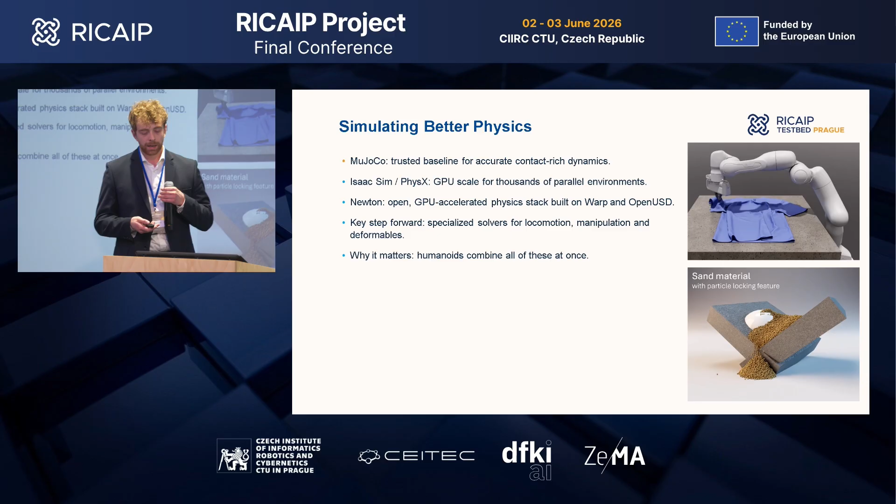Now let me introduce Newton physics, which brings the idea of a multi-solver physical stack. The important idea is to use a specified solver for the right phenomenon. From solvers for contact-rich learning, through complex parallel joints without numerical instabilities, to specialized deformable solvers for soft structures, non-rigid bodies, clothing, or hanging cables. And in humanoids, all of them combine.

But to actually simulate the reality into every atom is impossible. Rather, we can use the simulator and its great advantage, and that's the scalability, and actually deliberately interrupt or disturb the scenes and also the robotic models. We can introduce randomization: randomized friction, textures of the surfaces, motor performances,

To fix this, we can introduce active domain randomization. It sets up a two-player game with the policy that's learning how to move the robot in the controlled environment, and the second, the adversary that actively pushes the limits of the learning environment. It ensures to achieve optimal learning rate.

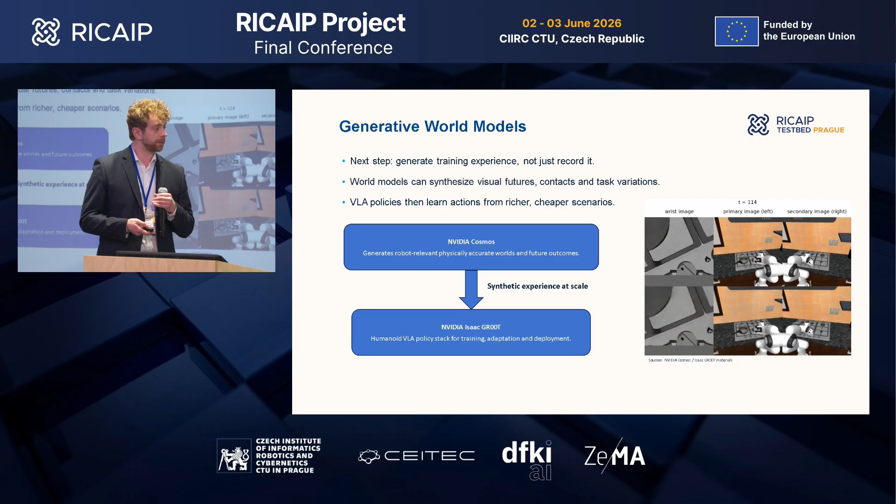And to conclude, there are still many challenges to solve, but the rapid evolution of physical AI makes them totally achievable. Thank you very much.

Thank you so much. And also congratulations on your new center. That's awesome. Yeah, celebrating young talent. Thank you very much. And also goodbye to Antonio. You will be missed. Thank you for all your contributions today. Thank you. Thank you so much.

Right, the next person to speak to us will be on the theme of modeling the world and objects in 3D, and is Torsten Sattler, the senior researcher here at CIIRC CTU. Again, the floor is yours. Welcome. Thank you. Yes, please. Well, let's see whether you're still applauding in 10 minutes.

I'm Torsten Sattler. I'm one of the 4 tenure trackers hired as part of the RICAIP project. I think I'm the only one talking today. As part of RICAIP, I came to Prague to build my own research lab. And one of the things that we're doing is trying to build 3D models of scenes and objects, and that's what I want to talk about now. We're interested in building this from images. So our input is a set of images, and then we typically do 2 stages.

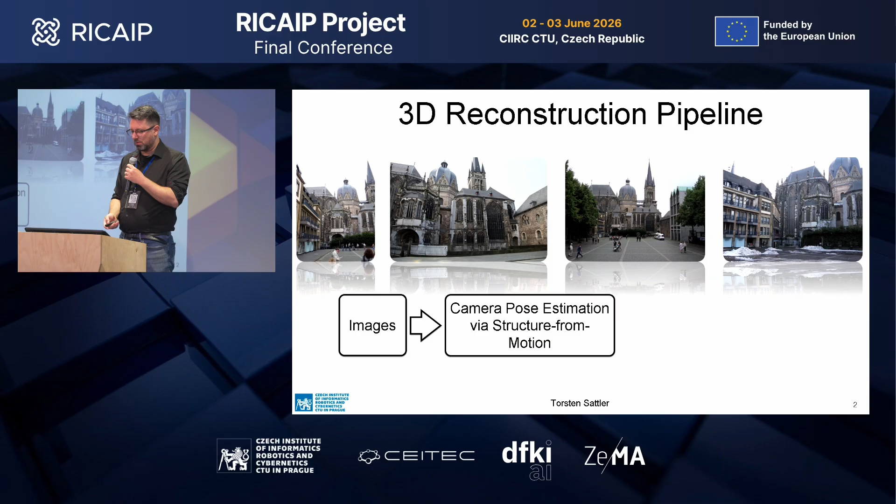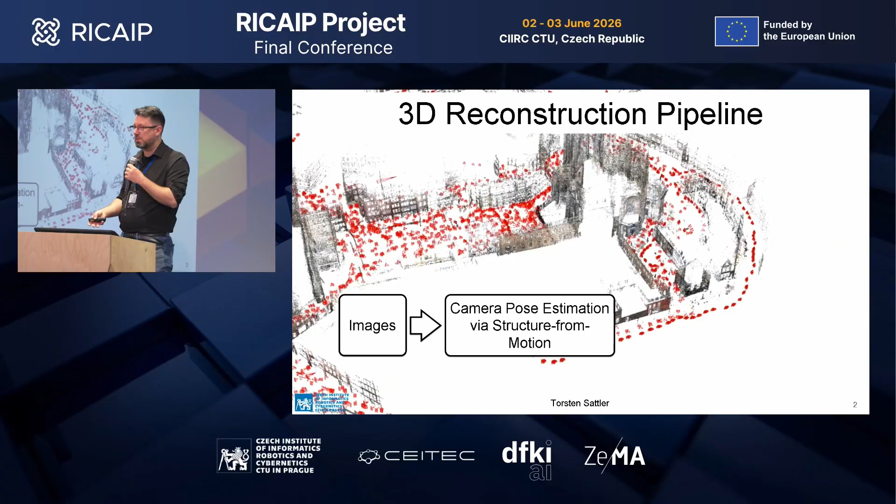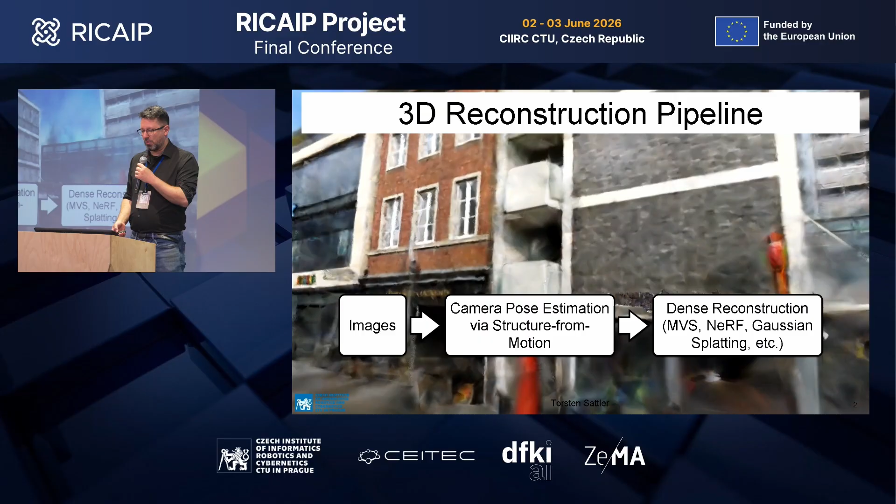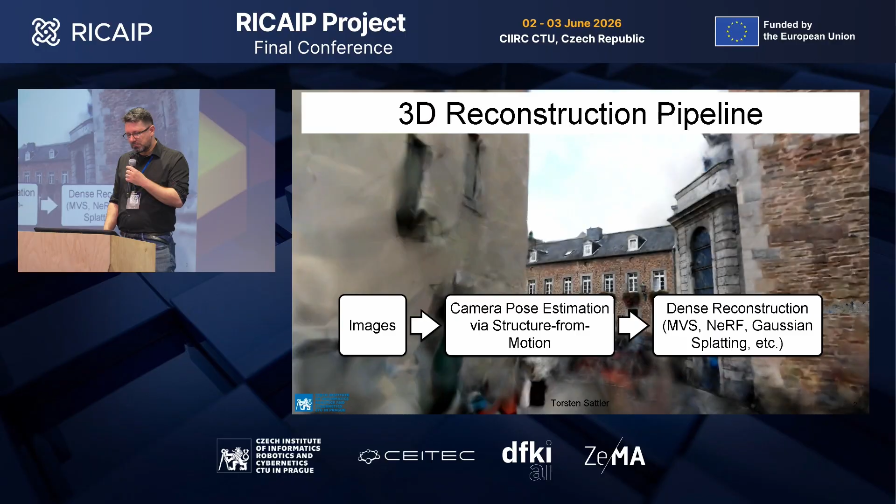The first tries to estimate where all of these images were taken using something called structure from motion. The output is what you see here: each red pyramid corresponds to the position and orientation from which an image was taken, and we get a sparse reconstruction of the scene geometry. And in the second stage, we try to build a dense, detailed 3D model. For example, what you see here is about 4,000 images captured in the city center of Aachen, where I did my PhD. And this dense reconstruction approach is done using machine learning.

More precisely, we follow an approach that's called Gaussian splatting, where the idea is I represent my scene through thousands or millions of small objects called 3D Gaussians, which are defined by a position, a spatial extent, essentially ellipsoids, and a view-dependent color function. View-dependent means that if you look at a surface from different angles, you get potentially different colors, allowing you to model reflections and refractions. And the nice thing is that you can render these things very efficiently, especially compared to prior methods, by essentially doing what GPUs were designed for 20 years ago, which is rasterization of objects.

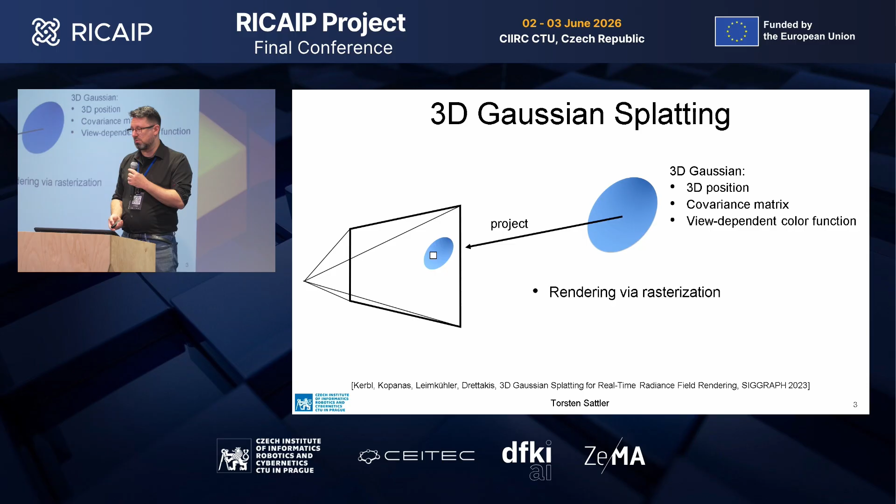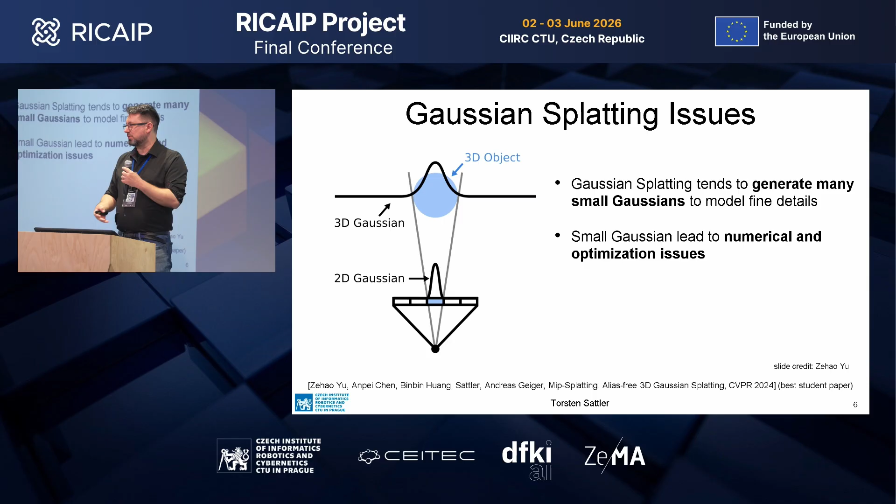What is happening there is that we are modeling objects by these 3D Gaussians. When we render them, we end up with a 2D Gaussian, and the whole learning algorithm tends to generate lots of small Gaussians because you want to model fine details. As with everything, small objects typically make the learning process hard. You run into numerical optimization issues.

And what the original paper published in 2023 did is they made sure that each Gaussian would render to at least a pixel by dilating the 2D Gaussian, which makes the training process robust, but introduces all these artifacts that you saw before: if you zoom out, everything looks larger than it should be because you dilate it to a pixel size when it should be smaller. And if you zoom in, you see these very tiny objects, which come from the fact that this dilation operation allows you to generate very thin Gaussians, but you still reconstruct the training images perfectly because you dilate them to the right size.

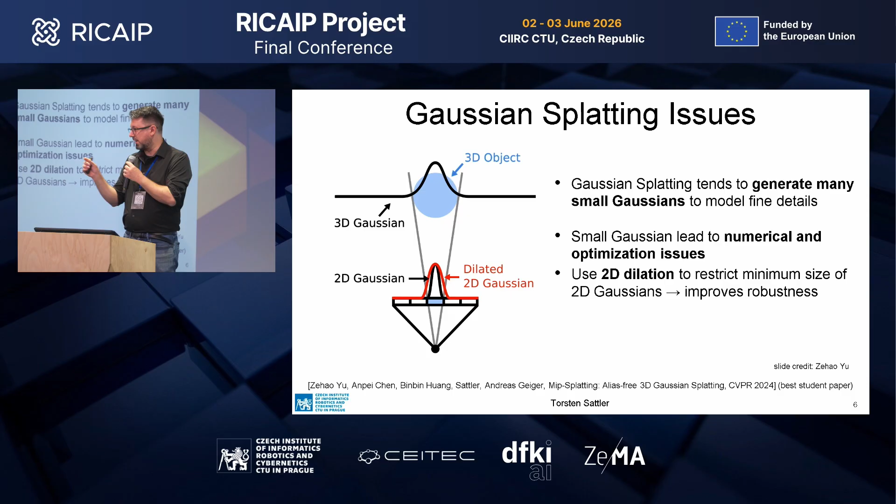In 2024, we showed that there's luckily a very, very simple solution to this: we have small Gaussians, which means lots of high-frequency details, and there's a very principled solution to handling problems caused by high-frequency details, which is low-pass filtering. So we enforce that 3D Gaussians have a certain minimal size, and then do smoothing in 2D to handle artifacts.

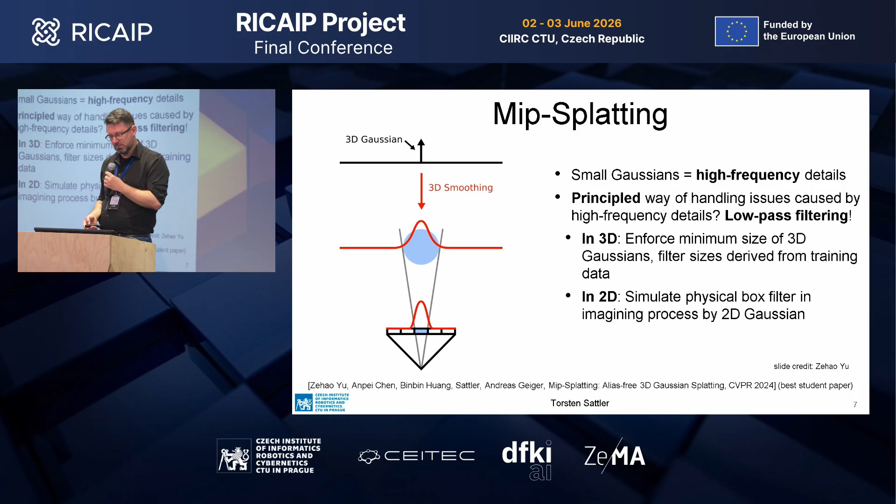As the previous speaker mentioned, one of the things that you could use this technique for is creating virtual worlds where you then can train robots. And for these virtual worlds, you would like to have control not only over the viewpoint, but also over the conditions under which you observe this. So this is Trevi Fountain in Rome, trained from images taken under different conditions, day and night. So we developed an approach that would allow us to handle this type of change.

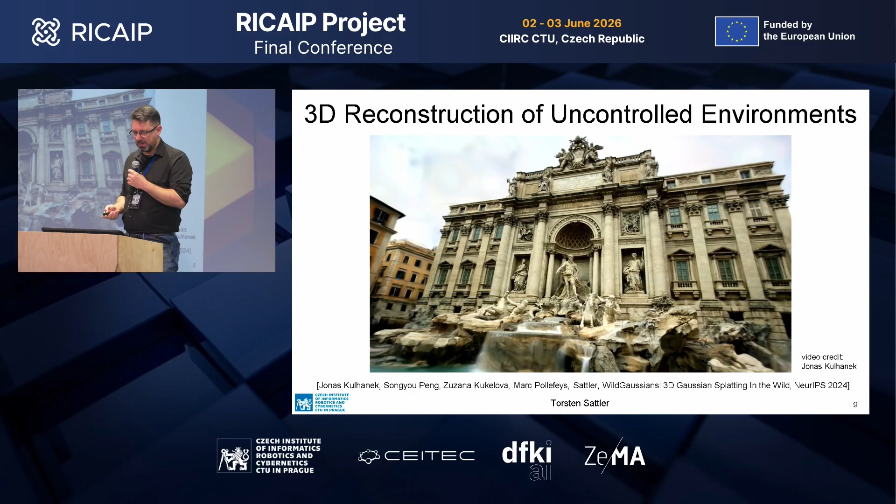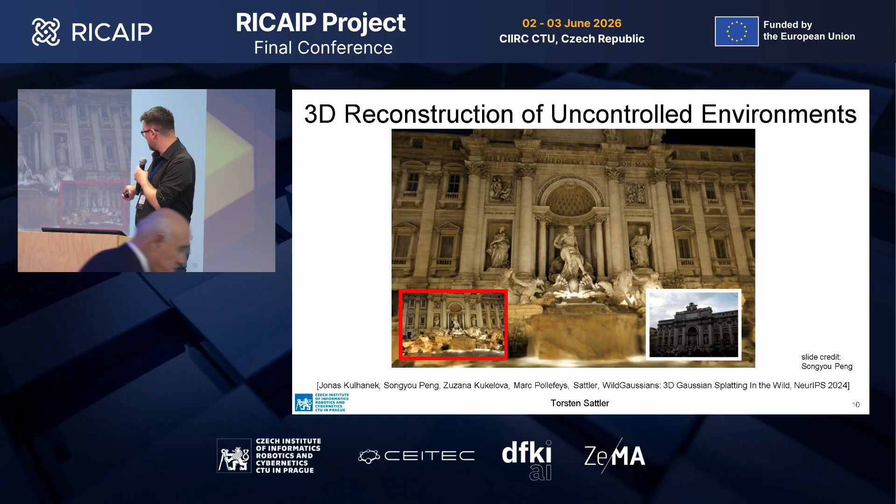It allows us to not only change viewpoint in the scene, but also change illumination conditions, and we get a very smooth interpolation. So here you see two conditions, and we smoothly interpolate them and apply the resulting lighting on the model, and you see that it smoothly varies from day to night, different illumination conditions. But this required that we would actually have data of the scene taken during the day, at night, and so on.

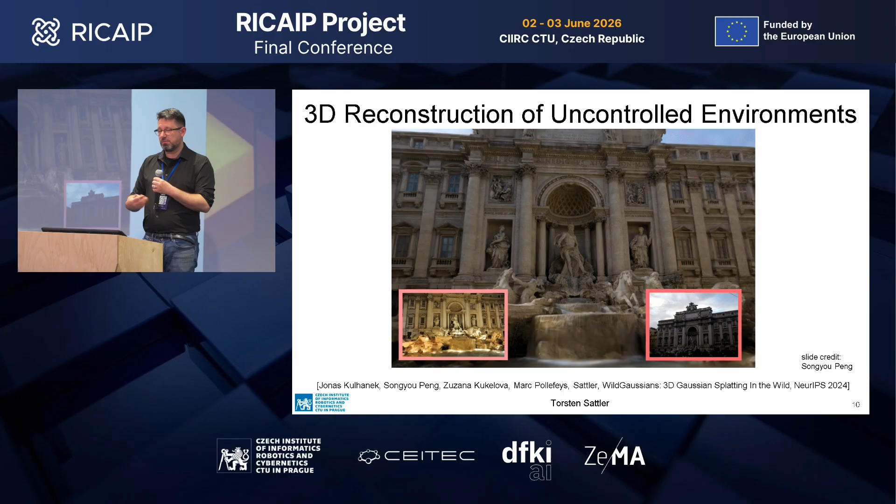And one question we're currently looking at is how can you simulate different conditions if you don't have the data? For example, if you had only taken images on Halloween night, could you simulate how the scene would look in summer during the day or in winter at night? One of the things we're looking at is using generative AI to simulate these different conditions. And here's a very sneak peek of the results.

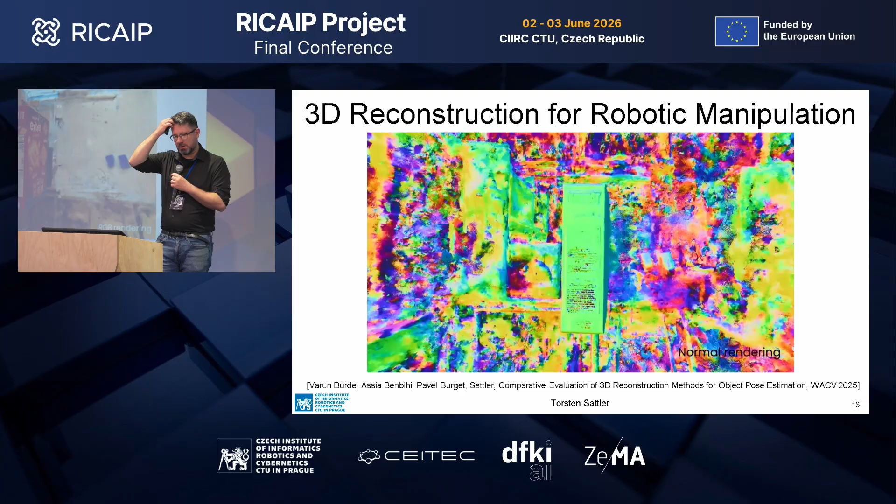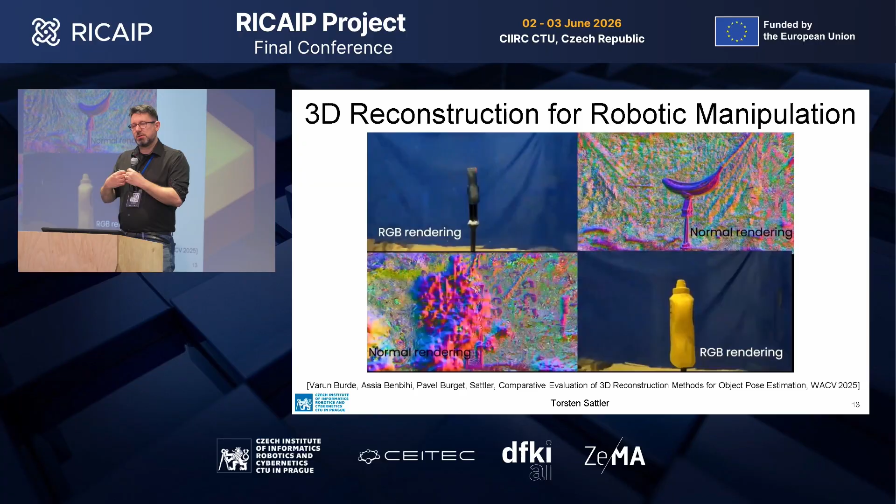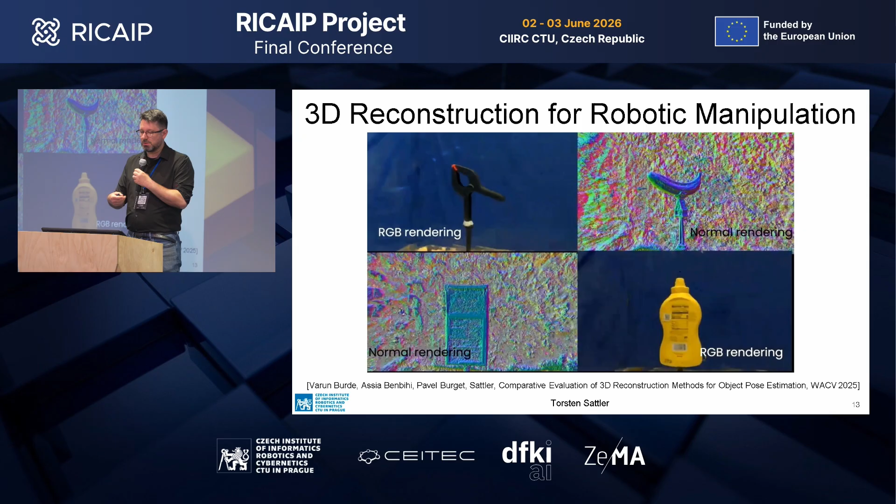The other question is, can we build 3D models that are actually useful beyond display or simulation? In a different line of work, we looked into using these 3D reconstruction techniques for object manipulation for robots. So in this case, we would scan different objects and reconstruct them, and then use these reconstructed objects rather than ground truth CAD models for object pose estimation. So the question was, can we go beyond needing very precise scans of objects that the robot could identify, estimate their pose, and ultimately manipulate, and do this only from images? And this is the result.

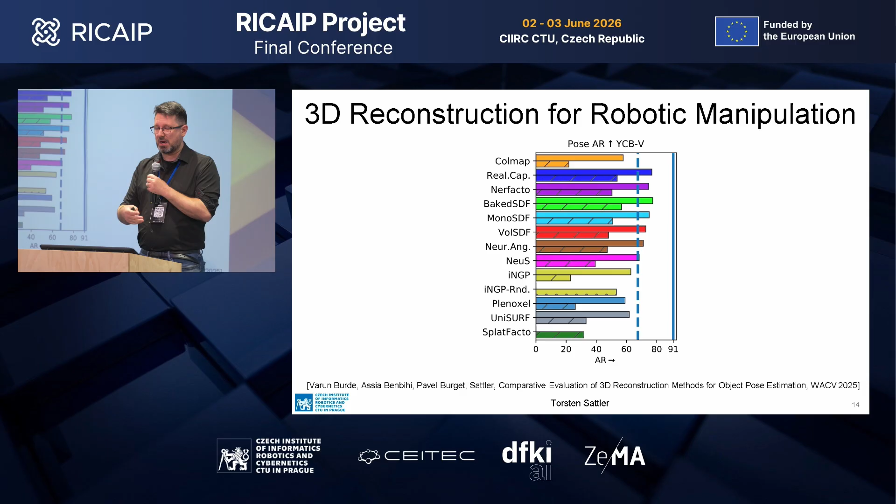And in recent work that Varun Burde, who is Pavel's and my PhD student, is going to present at ICRA, I think today, we looked into whether we can also use these 3D models for object manipulation. So given a reconstruction, which is the red model, can we determine where to grasp the object and then grasp it in simulation? And that's an overview of what we are doing.

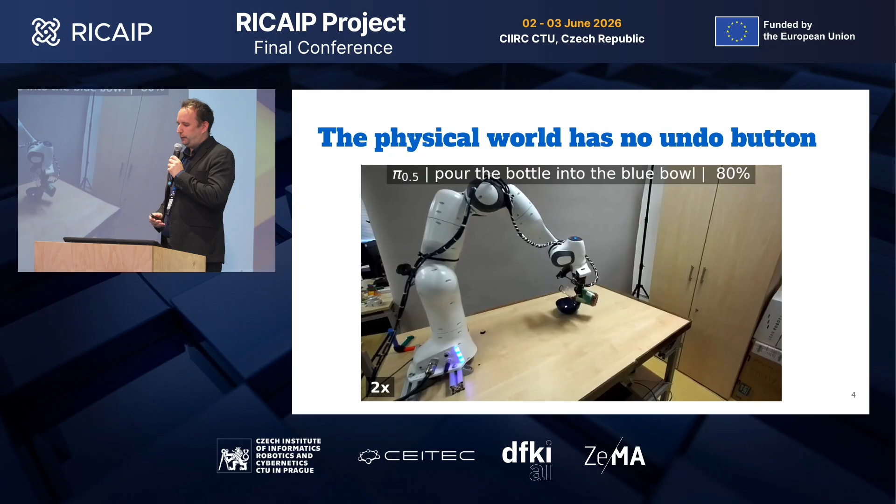But AI isn't perfect. There are always mistakes and misunderstandings we can't fully get rid of. In the digital world, a mistake is a click of undo. In the physical world, it's different. A mistake is either hard to recover, like this pouring example here, or it's dangerous to humans surrounding the robot. And the physical world has no undo button.

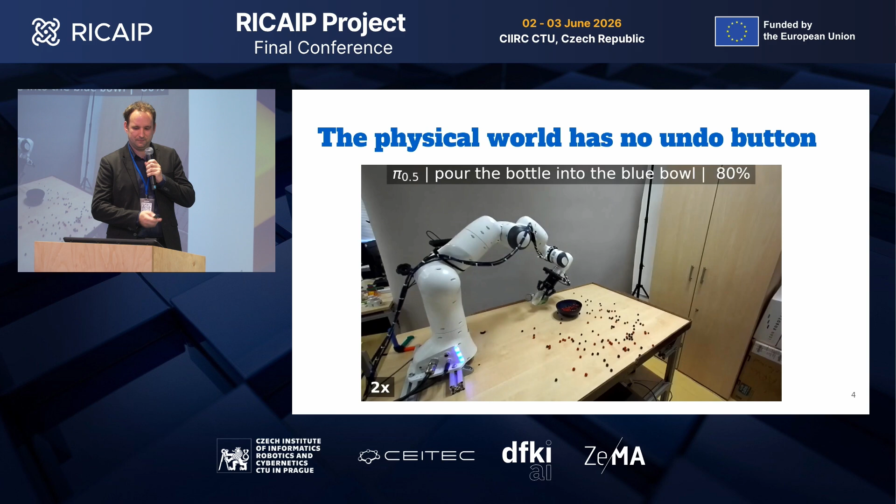So the real question is not whether we can achieve impressive results, but whether we can trust them to act correctly before we let them into your homes or factories. And that's a validation problem. And to tackle that, we started with simulation. We built a benchmark called Realm, where you can run thousands of trials safely overnight. It's real-to-sim validated, so we can trust the results.

And Realm shows us where a policy breaks. We change the lighting, add distractors, or rephrase the instruction. So instead of pick up the banana, we say pick up the yellow object. And the results are sobering. Today's best policies succeed only 60% of the time.

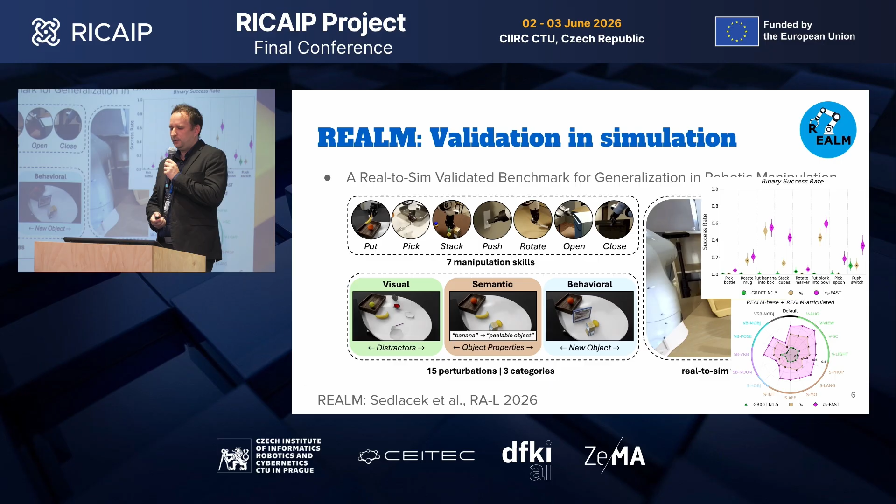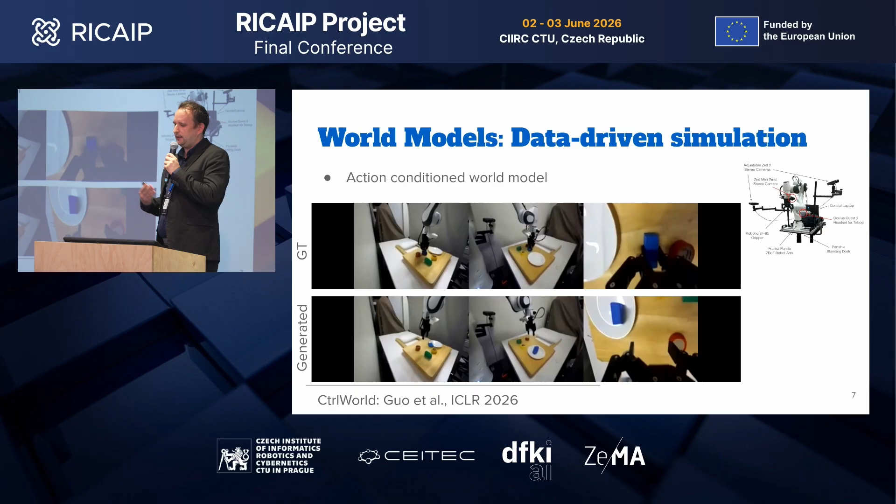But not everything can be simulated reliably or fast enough. So can we use a data-driven simulator instead? That's the world model, as we saw already. More concretely, these are action-conditioned world models. You give them an initial observation and a sequence of actions, and they generate the next multi-view observation autoregressively. Here is an example generated by Ctrl-World from Stanford. It produces nice-looking visuals, effectively simulating what the robot would see. And all of it was learned from data.

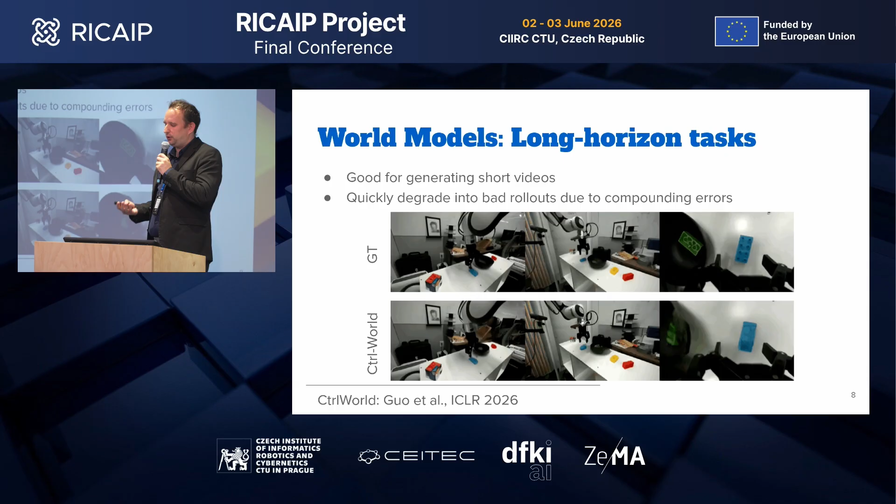But our world is not only RGB. Our world is 3D, and the robot needs to understand it. So we designed DepthWorld. It predicts 3D geometry using depth and point map, and allows the robot to reason about the geometry. Additionally, by predicting the depth, we also improve the quality of the RGB prediction itself. But both classical simulator and world model are still only proxies of the real world. In the end, we have to validate in reality.

So the community is building exactly this, real-world validation. It's called RoboArena. Real arms in real laboratories run the same policies on the same tasks, and they are ranked by blind comparison. And CIIRC is part of this evaluation. We are one of the evaluation units. So this is real physics. We can trust the results, but it comes at a cost. It's slow and expensive. And every single trial needs a human to set it up, watch it, and reset the scene. So real-world testing today doesn't scale.

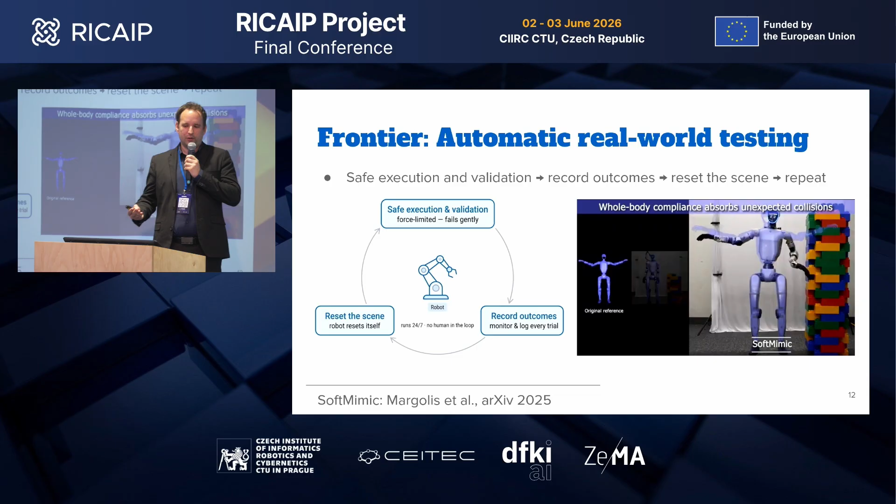So the frontier, in my opinion, is making real-world testing scalable, with no human in the loop. The robot runs the whole cycle itself. It executes the task safely, records the outcome, resets the scene, and repeats. But safety is what unlocks this. We need robots that reason about forces and fail safely, so that they can run without the human. On the video here, you see a result, whole body compliance from an MIT team, which lets the robot absorb an unexpected collision instead of breaking something. And once we achieve this for all robots, we can run them safely, they can reset themselves, and validation will finally scale.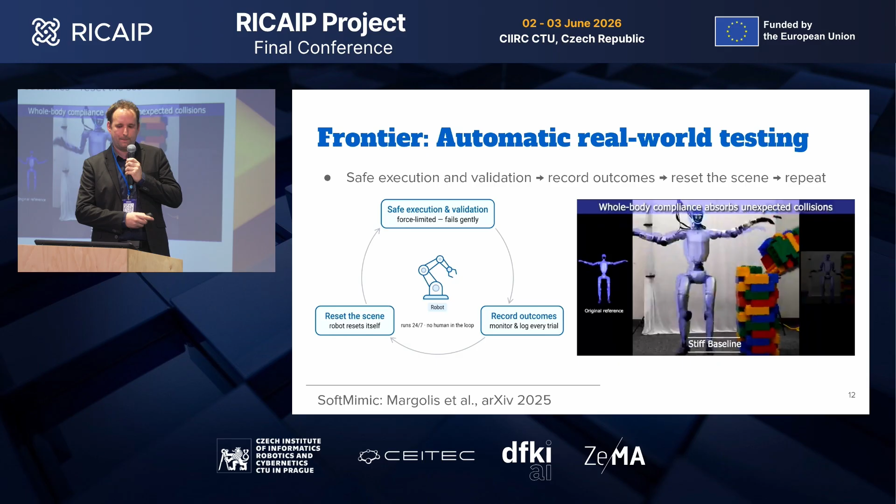I talk about robotics mostly because that's where my expertise is, but robotics is just one instance of something bigger. The same physical AI loop applies to many different domains, including manufacturing, energy control, and biotechnology. All these areas require AI in the loop and a control layer, yet at different control frequencies, from milliseconds in robotics to days in biotechnology. That's why CIIRC submitted a large research infrastructure proposal to create this infrastructure for physical AI that allows AI models to be validated and to interact with the physical world.

So to conclude, in my opinion, the physical world is the next frontier. Thank you.

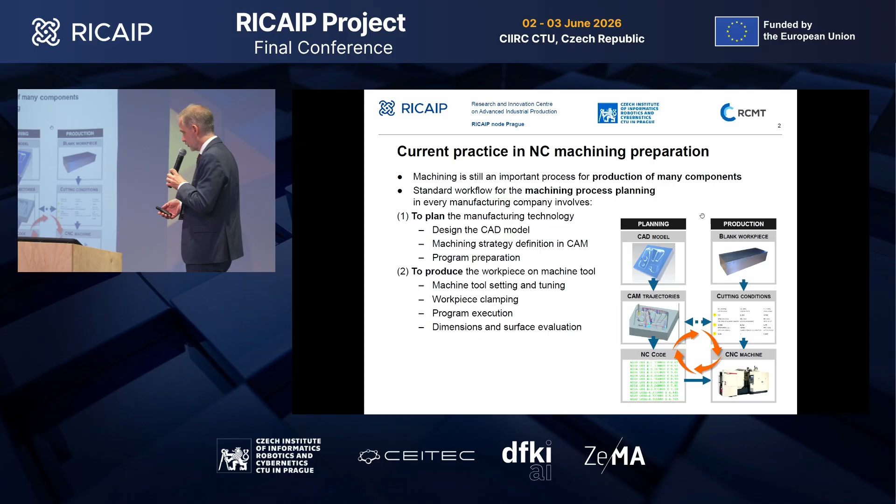Therefore, in many cases, we need to tune process parameters directly on the machine and do iterative processes on the machine before we can launch production to reality and have outcomes of the machining operations which fulfill the requirements on accuracy and surface quality, and of course also on machining time.

As I've already introduced shortly, the new paradigm is brought by digital twins. We have been focusing in our use case on two different levels of the digital twin. The first is the predictive digital twin, which allows us to test the machining in a completely virtual environment before we go to the machine, to validate whether our toolpath, cutting conditions, and whole setup of the machining operation fulfill the requirements on the results we want to achieve.

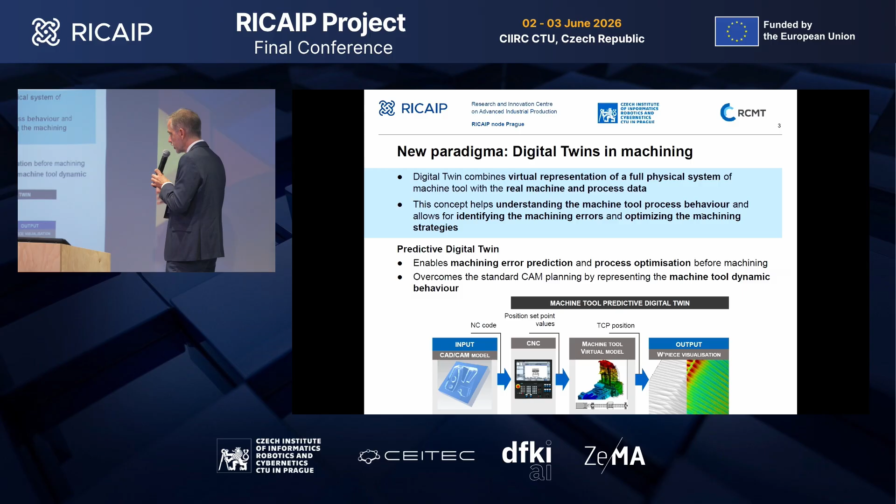I need to mention the digital twin concept consists of three main parts. The first is the physical object, in our case the machine tool. The second important part is the virtual model. And the third important component is the data transfer, in both directions, from the physical object to the virtual model and back from the virtual model to the physical object.

The other level of the digital twin we have been testing is what we may call the post-process digital twin, based on edge data we can get directly on the machine. The difference in this scheme is that the data according to which we run the virtual simulation are obtained directly on the machine from the linear scales, and we can then get, theoretically, directly on the machine the picture of the machining results without needing to take the part for measurement and back to the machine to get the results we want to have.

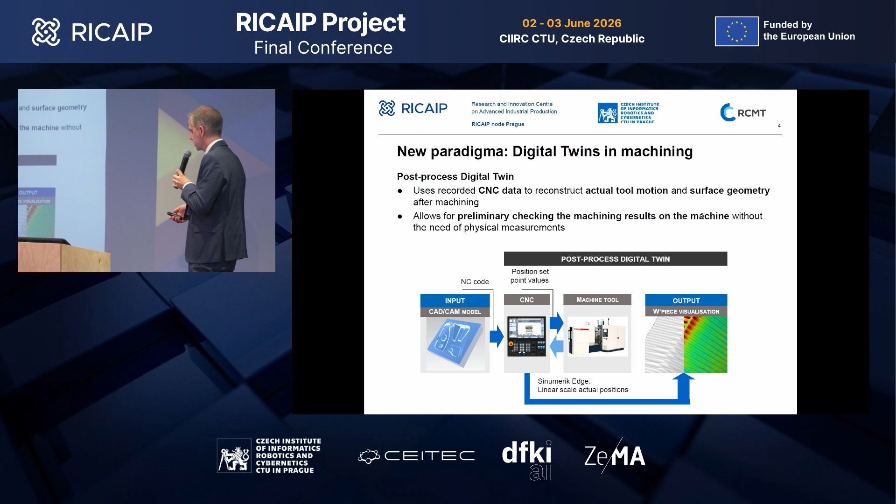So those are the two levels of digital twin we have been testing.

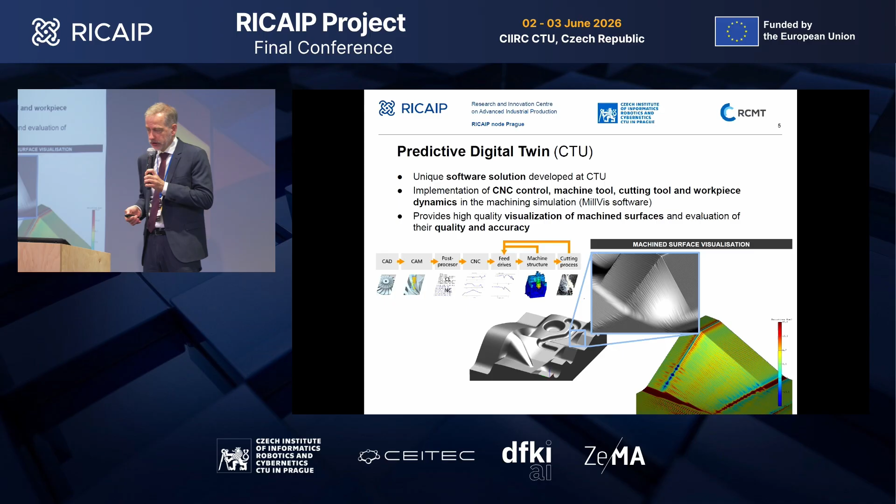Here I would like to give you a short glimpse also on the simulation tool we are developing for a long time at CTU, which provides a very detailed analysis of the machined surface, both in terms of surface quality and machining errors. This is an important part of the whole concept of the digital twin, so without this visualization it would be very difficult to assess the results of machining operations.

Now, our use case in RICAIP, one typical machining operation where the digital twin may provide benefits in evaluating quality and accuracy of the machined surface, is freeform machining represented by mold machining. For those operations, a key component in the whole chain, from CAD/CAM software preparation up to the machining process, is the CNC controller system on the machine, which is responsible for possibly many errors occurring in machining, or vice versa. Proper setup of the parameters in CNC control can save the machining results.

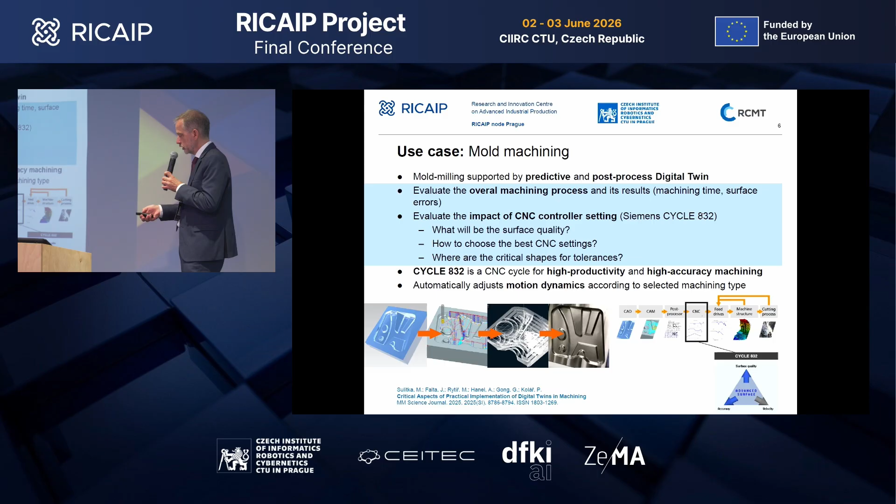We have been doing our study on a numeric controller which provides a specialized cycle 832, allowing the user to set process parameters which lead to smoother path motion of the tool and shorter cycle time. Now we will see a few pictures illustrating the results which we have been capable of getting completely in a virtual environment.

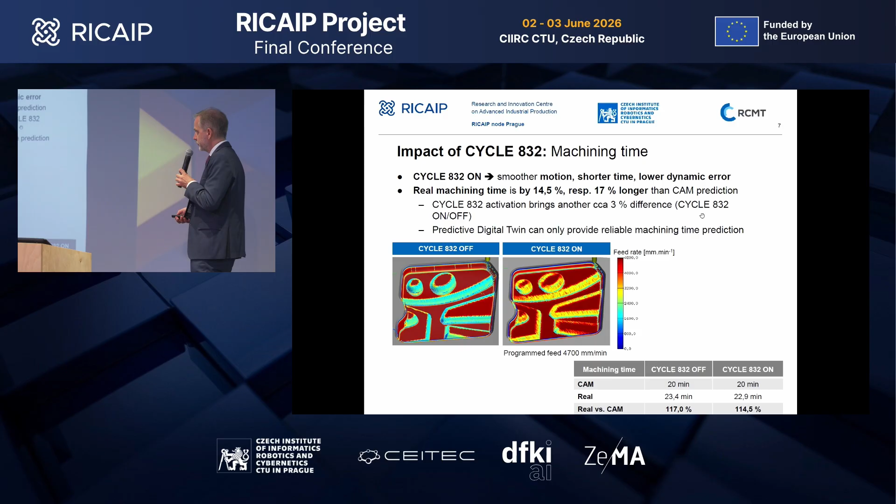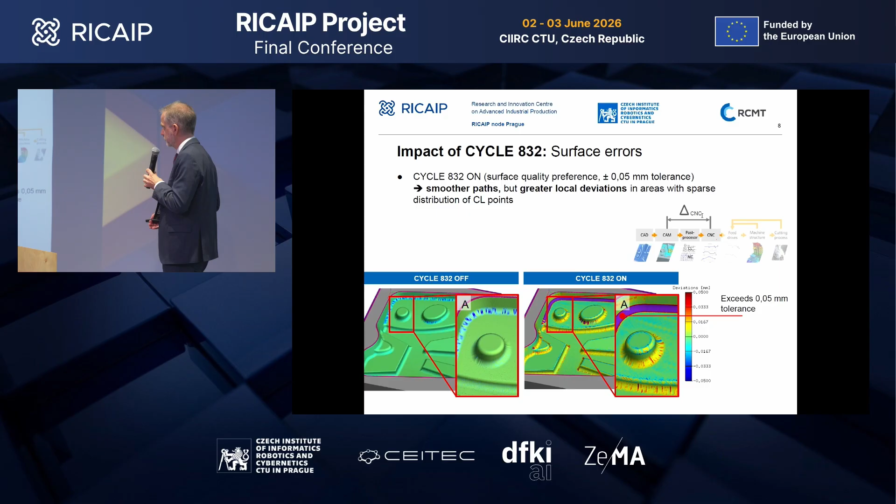Again here we can see the comparison in both cases, with significant differences in complicated parts of the mold. When we activate cycle 832, we may get errors exceeding even the allowed geometrical tolerance, which here were caused by improper setup of the toolpath, namely selection of the cutting tool diameter with respect to the radii of shape details on the mold. Again, this is something which in reality we would discover only on the machine. So here in a completely virtual environment, we could already see the impact of the process setup.

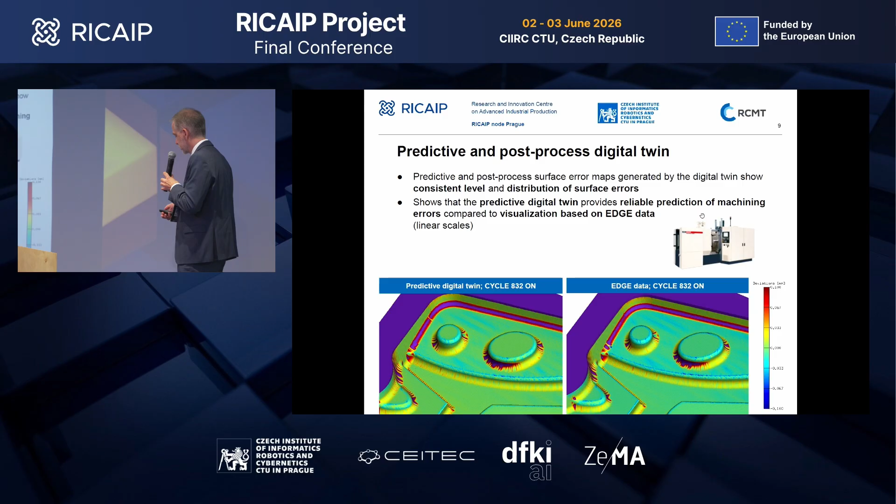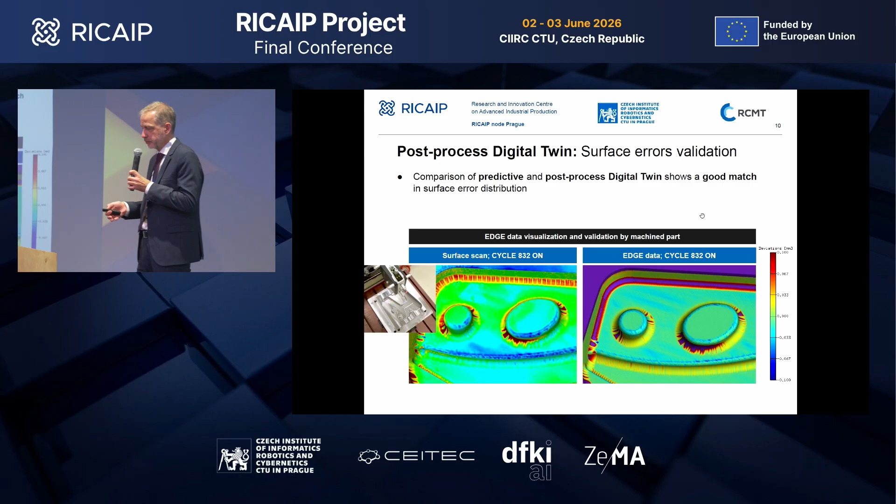Last but not least, it's important how the virtual results look in comparison with reality. Here is the comparison of the scan of the machined surface with the visualization obtained by the post-process digital twin. Again, we can see a very close distribution of the machining errors and surface quality. This altogether validates the digital twin, both in predictive and post-process form, as a reliable tool for predictive testing and post-process evaluation of machining results.

This gives us the chance to see a vision about how we can use digital twins in the concept of distributed production. Let's imagine we have company number one, responsible for the complex product and distribution of tasks to more producers. Then we have company number two, equipped with digital twins of machines at different production sites, which can run in the manufacturing execution system the virtual simulation and evaluation of the output of single machines available at different production sites.

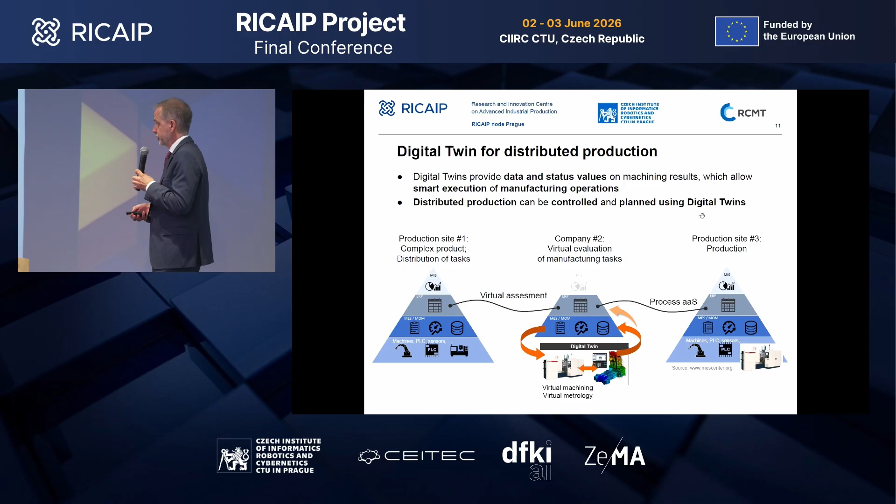Last but not least, we may have more production sites already equipped with real machines. After evaluating the results in a virtual environment, company two may already distribute in an informed way which companies will get the manufacturing tasks and which will complete the whole production, leading back to company number one, responsible for the whole product. So this might be a vision about how we can use digital twins in distributed production, and how they may help in scheduling manufacturing tasks among more manufacturing sites.